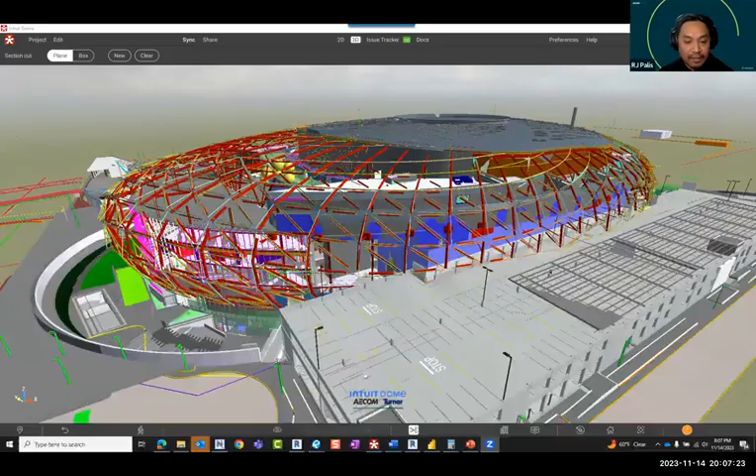There's always going to be something you're going to learn, so hopefully I learn from you guys, and hopefully I can share something you don't know as well. Okay, so we're going to do something new. I'm going to create a project from scratch, so strap on your seatbelts, I guess. We'll see how this works. All right, I'm going to share my screen here, so I'm not going to toggle between different things. Let me know once you guys see Bluebeam. You can see I was kind of getting nervous earlier.

I was like, I gotta make sure this works first, okay? So I did some demo here. I'll keep this in my back pocket in case things go awry. And we can see it, okay, RJ? Perfect, perfect, all right.

So where do I start? Some settings. Now, on a design review, I think at one point in your careers you're going to have to do some sort of design review, especially if you're in a company that specializes in design builds, where a GC would contract out a team of designers under them. Maybe it's the GC that would run this design review process. And what a design review is, you can think of it as a page turn or page flip back in the day, where you go and review the drawings and see if it's constructible, or if it meets the design criteria by the owners. What's beautiful about Bluebeam is that you have this platform that can centralize that information.

And what we'll show later with Bluebeam Session is that you can mark up at the same time and have that information come back to you in real time. So this is going to be an interactive session. I'm going to send in some links so you can join the session, and some templates so you can apply it on your end. Let me know when things don't come up, and we can work it out as we go.

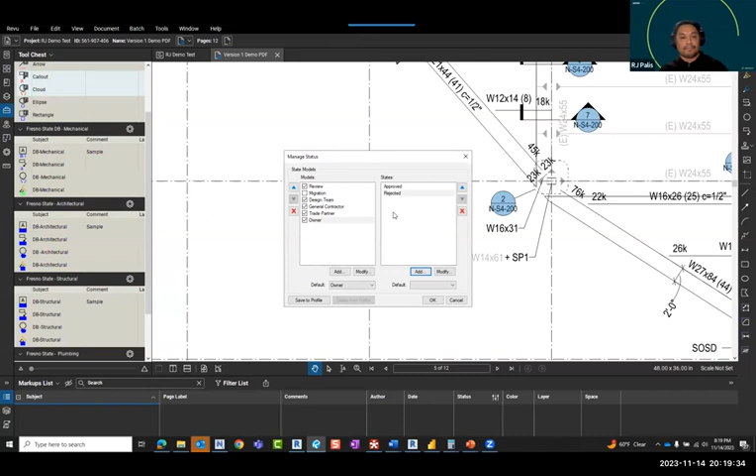So that's the second setup that we want to look at during this process. We're kind of conditioning this particular document to accept, to have these sort of built-in features within it before we get started. I'm going to go ahead and export this profile.

That's because I want to share this with you guys, because this is part of the interaction - you'll be able to import this to your system and use the setup the way that I have it, right?

And that's typically what's done in projects, is that it's not a BIM manager, it's probably a design manager or design coordinator sort of setting this up, right? So I'll go ahead, because I'm going to forget where I put this, I thought I have one here, OneDrive.

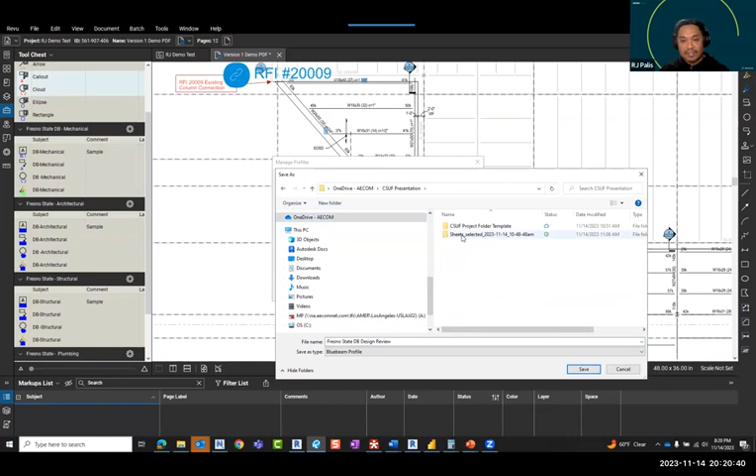Forgive me that I use CSUF. I don't think that's the abbreviation for Fresno, right? That's Fullerton, its abbreviation. Yeah, okay, sorry.

We'll forgive you, okay. Thank you. So what I'm gonna do is go ahead and open that. I think I can drag and drop here on Zoom in the chat. Can I do that? What's the best way of sending this to you guys? I'm going to try the chat.

Let's see. Yeah, it looks like you could attach a file in the chat. Okay, cool, for everyone. You might have to go through the chat to attach it. You can. Then if you go to the little three dots, it should work. Yep, I found it. It's gonna work. Just let me know, I'm gonna attach it right now and let me know once you guys get it.

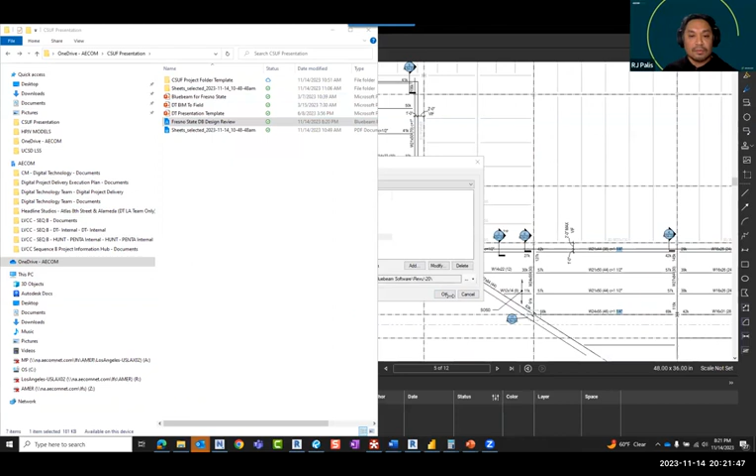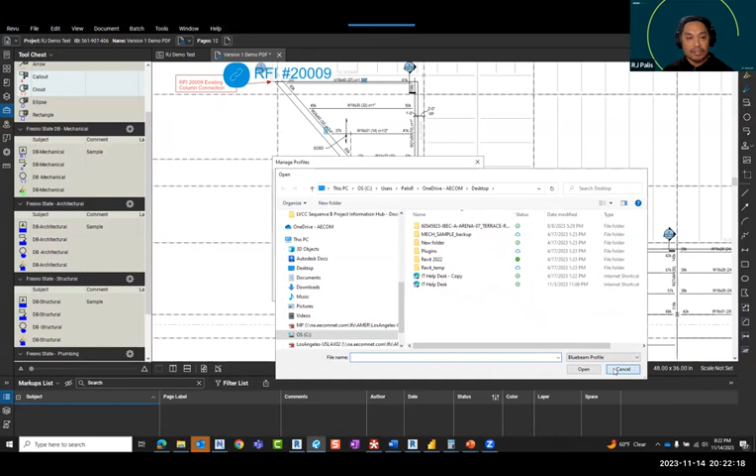Yep, it showed up in the chat. Okay, perfect. Now to import it, once you guys save it to your local drive or wherever you want to save it, it's as simple as going to Profiles under the Revu tab, Manage Profiles, Import. Then you should be able to look for your file wherever you saved it, and go ahead and save and open it. It should now be an option for you to use.

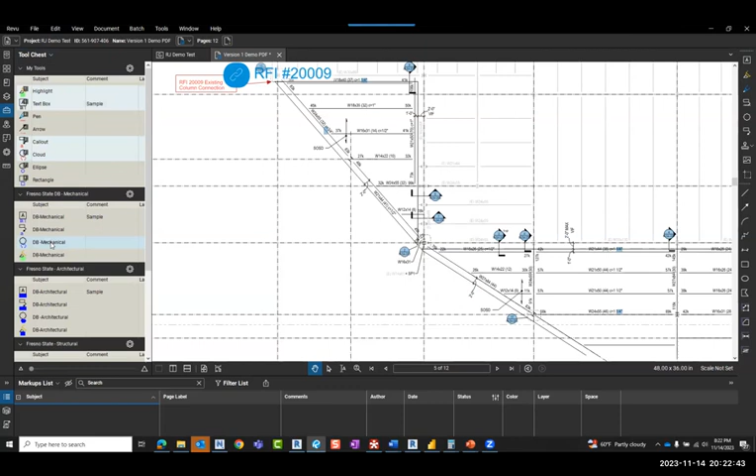So when that's done, let me know if you guys need some time to catch up for those that are following. Once you select that, you should now have this tool chest as an option. RJ, you can also open it just as a file and it'll automatically import to Revu. Sweet, okay cool, thank you. All right, thanks for that tip, Louise.

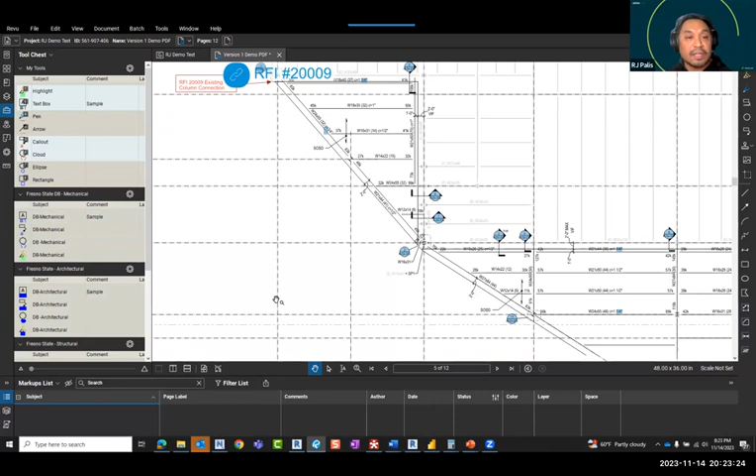Any questions there before we go on to the actual Bluebeam project now? So what we did right now is pretty much just condition this particular document. I use this one to create these samples, but later on, after I put this file on Bluebeam Project, you'll see that since you've already acquired the template, you'll be able to apply it here on the Bluebeam Project. So now we're gonna go and actually, I'm gonna check this back in.

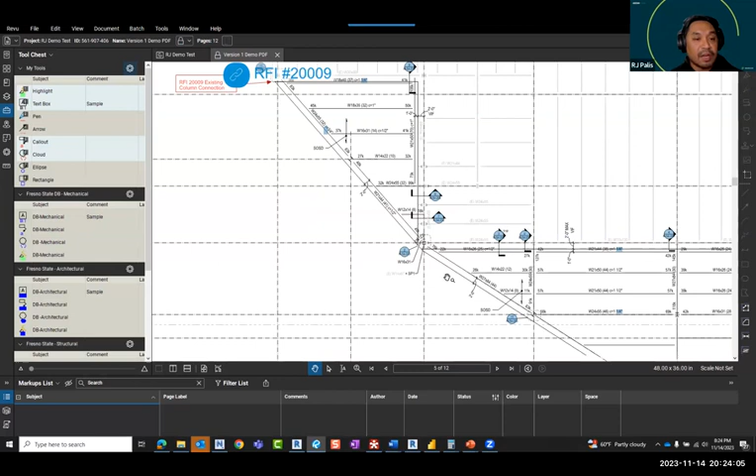Now we're going to go into the Bluebeam Project. For those that don't know, it acts like a file server where you can store files all in the cloud, the Bluebeam cloud environment. And what that does is you're able to share and work on those files almost at, I don't want to say at the same time, because there are sort of gatekeeping methods where you're only able to check out documents. That way it protects its version from being overwritten, right?

So now I'll go ahead and demonstrate how to create a Bluebeam project. I'm not sure what version of Bluebeam you have, but I think I did not have that as my option here. That's okay, I can always go. So whatever, on that profile that I had, I did not list studios. I didn't have an option there for studio, but that's okay.

You can always toggle back to one that's a safer one, and then we can toggle back to the other profile later on. What I want to show you is go ahead and click on the Studio here on the left-hand side. There are two tabs you're going to see here, one for projects and one for sessions. I will make sure that you're signed into the right server, signed into the right account. You'll see that you're connected online by this symbol. So I'll go ahead and click on Add. I'm gonna create a new project. I'm gonna call this Fresno State DB Demo.

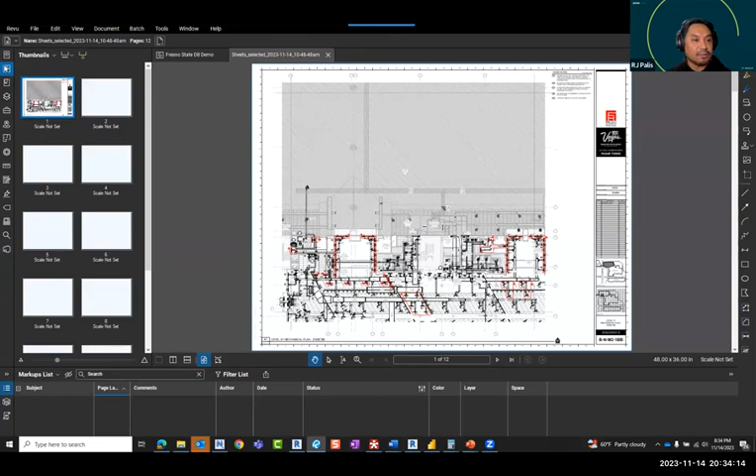I'm gonna go back one folder, and I extracted this from a project. We're gonna get 12 sheets, it's not gonna be 12 on your project, it's probably gonna be 100, 1,000, whatever. And it's all just lumped into this mess where there's no bookmarks, nothing, and you're like, what the heck, how do I organize this, right?

And you guys probably know this already, but there's a thing called bookmarks and thumbnails. I forget the order I want to do this, but if you do get a file like this, what you can do is create thumbnails first. And to do that, we want to create page labels, and page labels will help you organize this a little bit later.

So what I'll do is go ahead, instead of bookmarks, I don't have bookmarks on there, which is a pain, so you even have to create your own bookmarks. But first I'm going to go ahead and do thumbnails. I'm going to create a page label, and I'm going to use a page region. You guys know how to use this already?

Yeah, I've used it before, but it's kind of hairy. Okay, same. Okay, we'll see if it works.

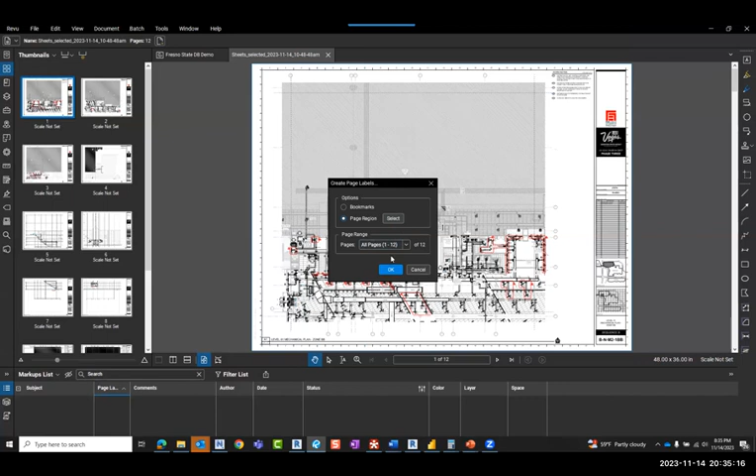So I'm going to go ahead and hit OK, choose a rectangle that contains text. Oh, you know what, I might have done that the opposite way, I don't remember.

Yes, I did it the opposite way. I think what we can do first is create a bookmark. Let's forget what I said earlier, I think I'm going to do this first. Go ahead, page select, create a bookmark, and I'm going to go ahead and highlight the title block.

That's your first region, and you'll see a preview there. I'm going to put up a space and then add another region, and click on the sheet title. And now that's how it looks. If you're not happy with how that looks, you want to put some space or a dash or something.

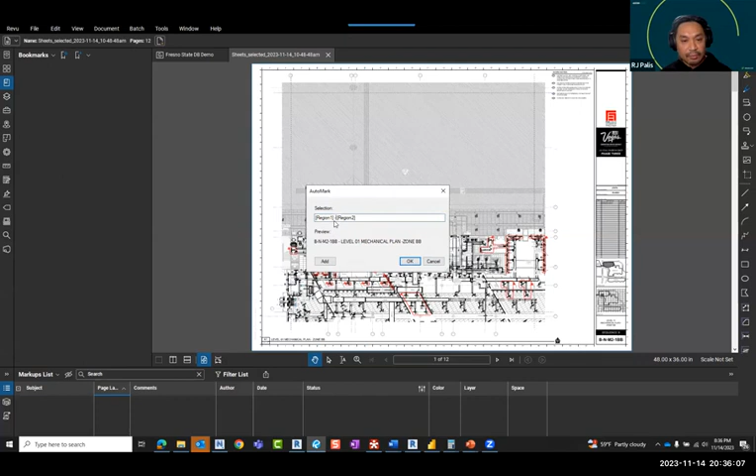I'm not sure if there's a limitation or a constraint here with what kind of character you can use, but I'm going to go ahead and use a dash and hit OK since I like that format. I'm going to go ahead and click OK, and it looks like it works.

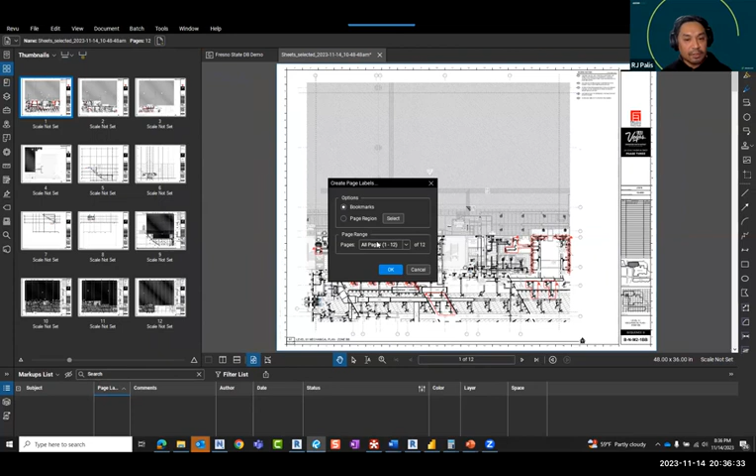And let's look at our thumbnails. Our thumbnails are not set up either, but what we can do is go ahead and create page labels depending on the bookmarks, right? Since we already created it, hit OK, and then bam, done. And now it's a little bit neater, it makes sense, you can read it from a high level. But let's take it a step further here.

I don't know if you guys have created nested bookmarks, but it's a great way to organize your drawings. It's manual, but it sure makes it super easy to organize and to view. To do that, you might have a better way of doing this, but this is the way I do it — I would go ahead and add a bookmark before, and I'm going to go ahead and type in, in this case, M for mechanical.

What I'm going to do is highlight these M sheets. These are the M sheets here, and it's kind of tricky dropping it into mechanical. So it's almost like... there you go. See, now you'll see that it's nested, right?

I'm going to do the same thing for structural. That's not going to work. Let's do that again. Add a bookmark, add before. I'm going to call it structural.

So it's almost like you're putting a WBS together. Yeah, if this was a spec, you can organize it. Not a lot of people do this because they rely on the naming to set it in order, that's fine too, but just kind of showing you guys. It's a little cleaner.

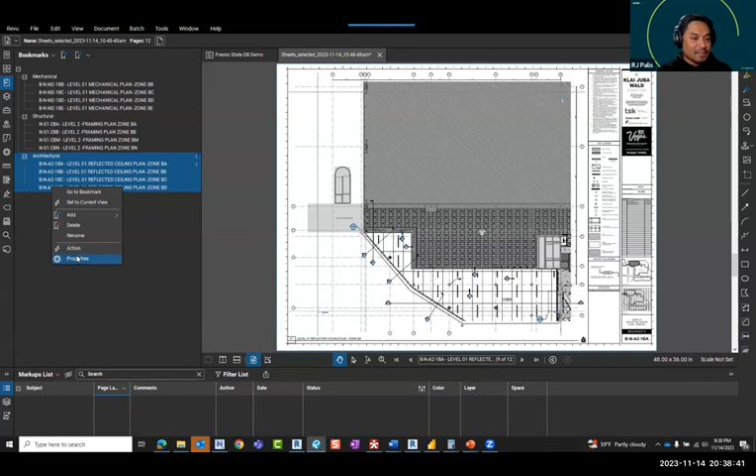I didn't know you can change the color of these. You go ahead and select it, right click. It was actually the interiors team that liked to color it, so that kind of made sense. So you can change the color to whatever you want. Makes it look nice, I guess. Just an option for everybody here to see. Don't know how useful that is, but it's kind of cool, right?

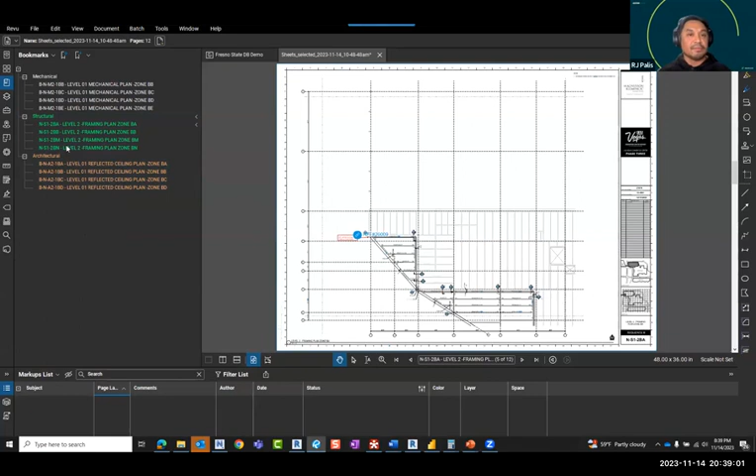All right, great. So that's one option you can do to organize the sheets.

Now let's see, I'm ready to save this. I'm going to use my profile here. I'm going to go ahead and just make sure I can still pull it up. Everything's still there, I'm using my DB design review profile.

I'm going to go ahead and save this, I'll save it back into my folder here. I'm just going to say Fresno State. Keeping an eye out here for time. Design review demo.

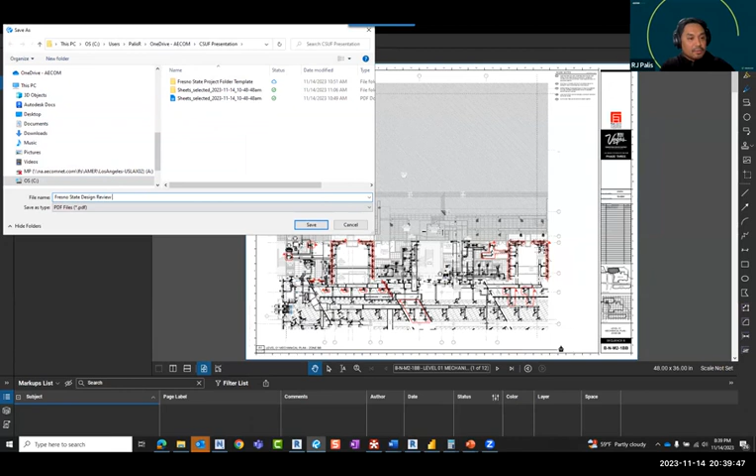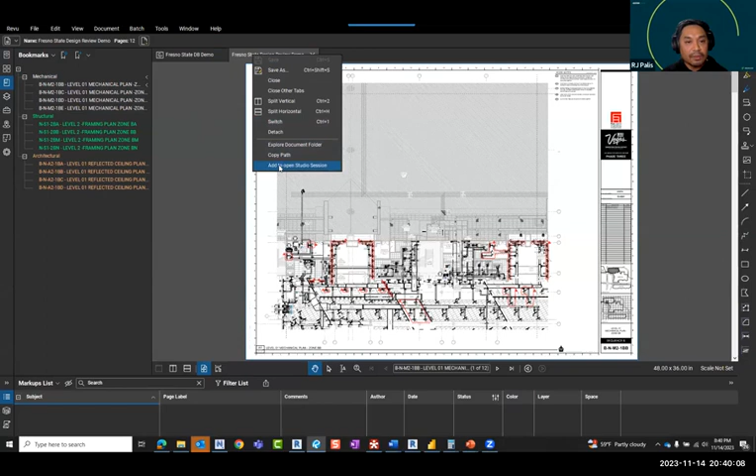All right, so now it's saved locally in our drive. And the quickest way that I know you can save it to a project is, I think I'm okay with add to open studio session, which we don't have one. We do have a project. So what I'm going to do is go back to my project.

I'm going to go ahead and click on the parent folder here. And somewhere here on the top where I have this Zoom window blocking me, so I can go ahead and upload files. I'm going to go ahead and upload a file. I'm going to go down here in this prompt. You guys probably know this already, but I'm going to go ahead and open the files that are currently open, or add the files, and hit OK.

And you'll see that this file now lives in the Bluebeam cloud. So now this is accessible for everybody, not just locally, right?

When I click on the file, you'll see that there's a lock up here. That means that you can't edit this file. So you'll see that all your markup tools are grayed out. You can only do a snapshot.

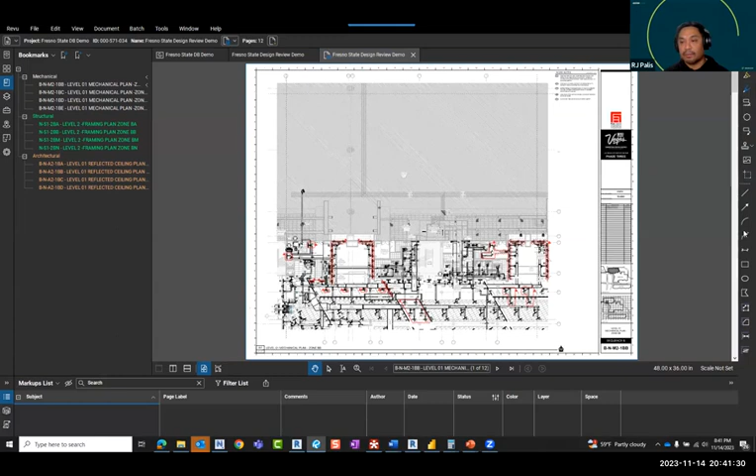For someone to edit this, they'd have to click on this lock up here and say checkout. Now your markup tools are available to use. Once you're done using this file, best practice is to just check it back in.

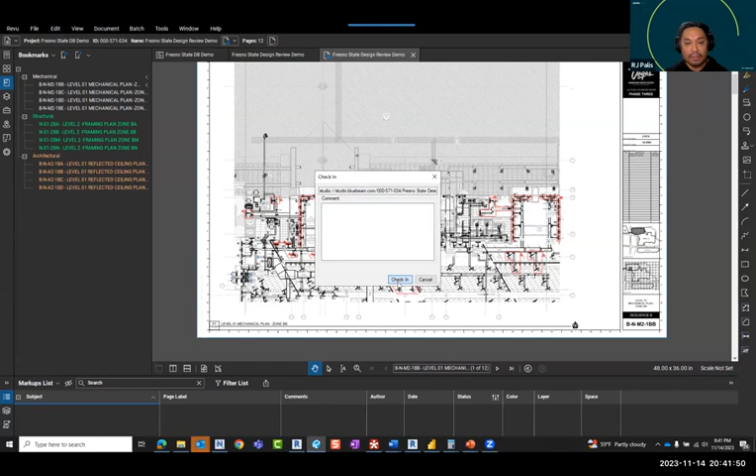Right, we can add a comment. Let's say you change something and you want to add that comment here, go ahead and do that. But I won't in this case, I'll just check it back in.

All right, we're going to go and speed up a little bit here. What I'm going to do is make this available in a Bluebeam session. And what we'll do in that session is have everybody be in that environment and then start marking things up, correct? So what I'll do is the quickest way is I'll go ahead and...

Let's see, open studio project tab. It's locked right now, and I think that's why I can't check it out. So I'm going to go ahead and open it real quick. I'm going to check out, and then I'm going to add it. I'm going to right click.

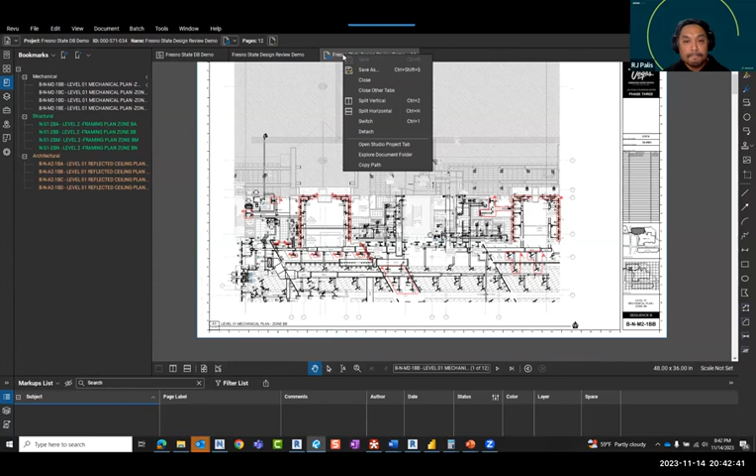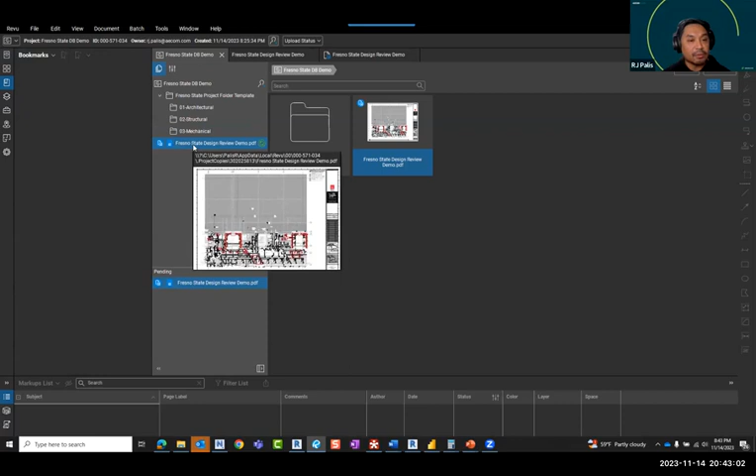Not letting me add it to a studio session. So there's another way if you get stuck like I am right now. I think the best way is to create first. Typically you would be able to upload this to a Bluebeam session, but I can't seem to make that work right now. So, but there is another way.

I'm gonna go ahead and open up Bluebeam Studio again. And you'll see right here, Bluebeam sessions. You can create one here. In this case, what I'll do is I'll create a brand new one just for the sake of showing you guys. And to do that, I'm gonna go ahead and let me just leave this one.

You'll see that there's a plus here, and I'll go ahead and do a new session, Fresno State Design Review. Now you can look at it, you can add the files now and say either add manually, and you'll be able to look for it in your folder. And let's just try this one, add open files.

This looks like the file that we have open, our demo. I'm gonna go ahead, I'm not gonna restrict it by email address. I'm just gonna make it open for everybody. Hit OK, it's gonna create that session.

And it's gonna add that file. It's gonna ask me to invite people here through the same way that we had earlier. What I'm gonna do is copy this session invitation, and I'm gonna put it up on the chat for all you guys that wanna join. And I do encourage you guys to join in the last few minutes here.

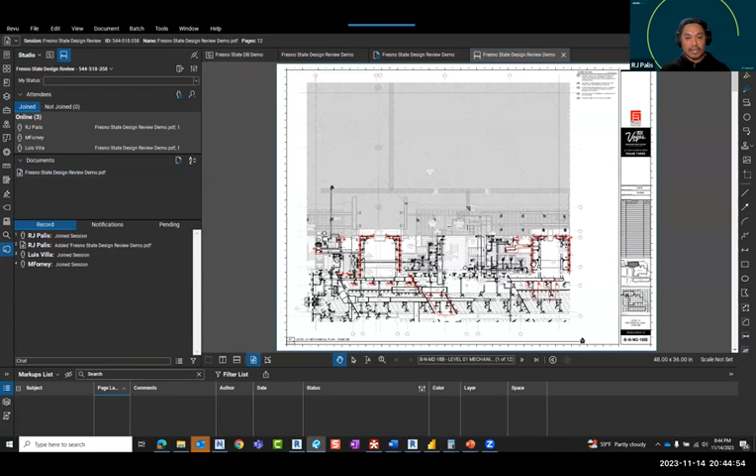So now what happens in the Bluebeam session with this document, it locks it in place. You can't add the statuses anymore. It's pretty much whatever was built in that document like we had earlier, right? You can still, however, pull up your profile here.

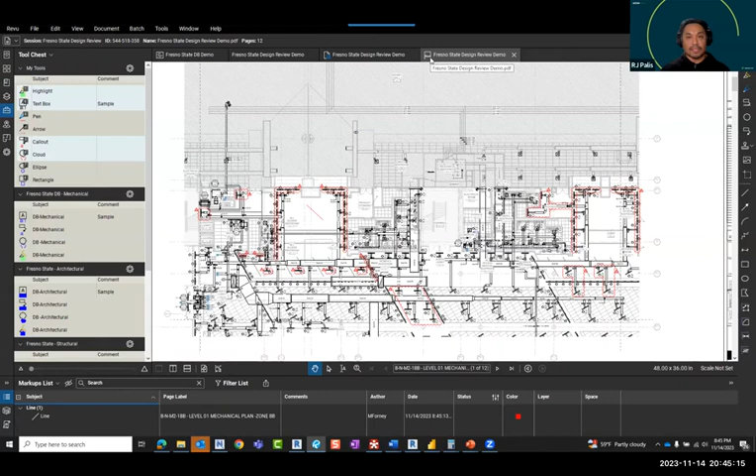Right, and you can see we're on the Bluebeam session because of this icon. I'm gonna cancel. So let's do a little bit of role playing here for those that are joining. We're on a design build project. You typically have designers that are on a project as well as subcontractors.

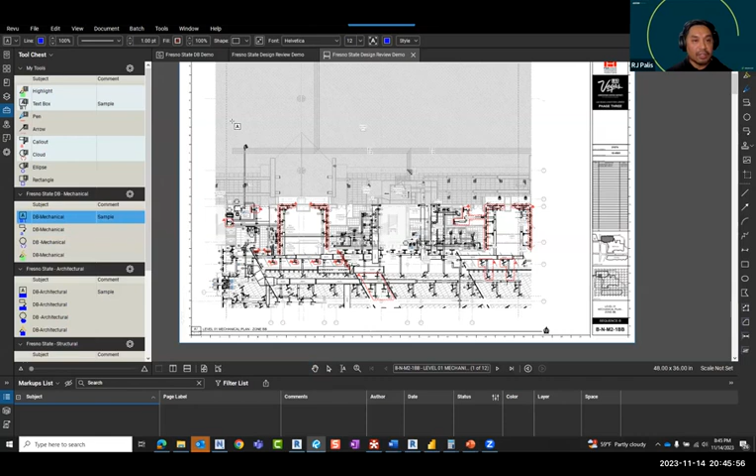And what the tool chest does now is, because we set it up this way, if you are an architect or if you are a structural engineer or a mechanical engineer, you have sort of these tool sets already built in for you. It has the settings already, the color, the font. So you're ready to go.

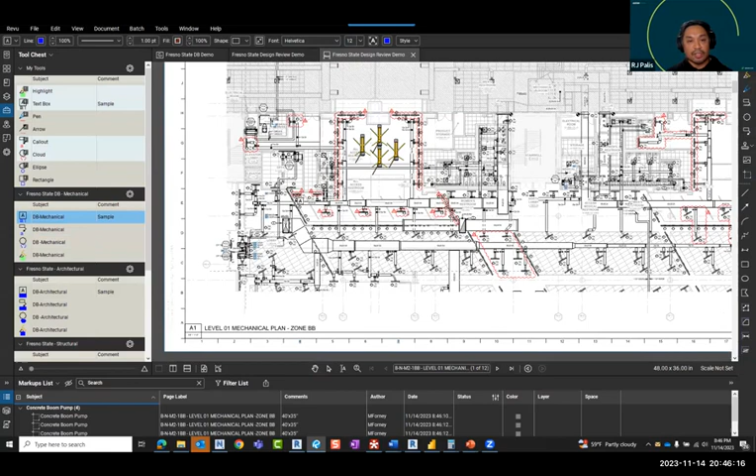You don't have to think about what you need to pick out from your tool chest there. So this makes it easy for the design team to start marking up, as well as it creates this uniformity within the project, right? So if you are on this sheet, you can start tagging things.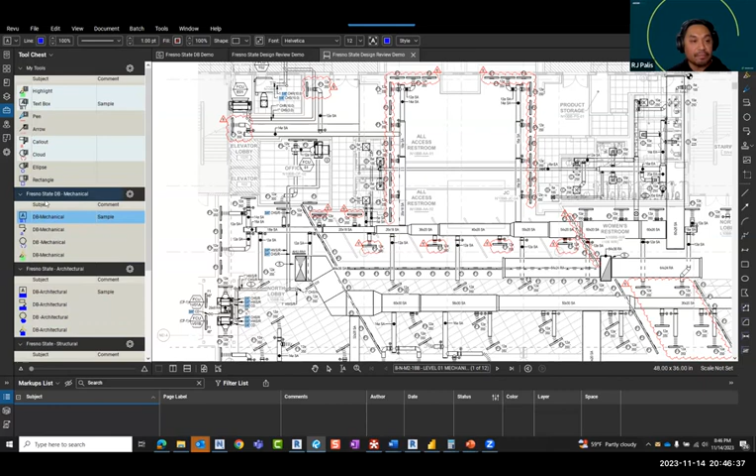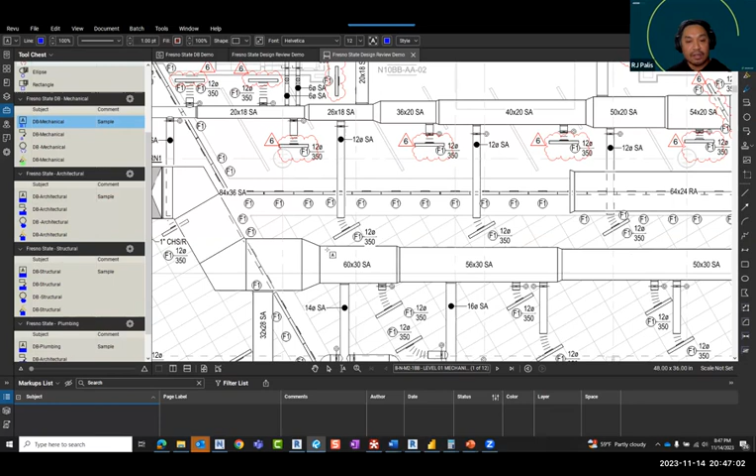Typically, what I've done in the past, what a lot of people have done in the past, is that they would have different color for each trade, right? And what I learned two weeks ago is that this method is not necessarily better, but because of the custom statuses that we built in, we can actually change the color based on the review status.

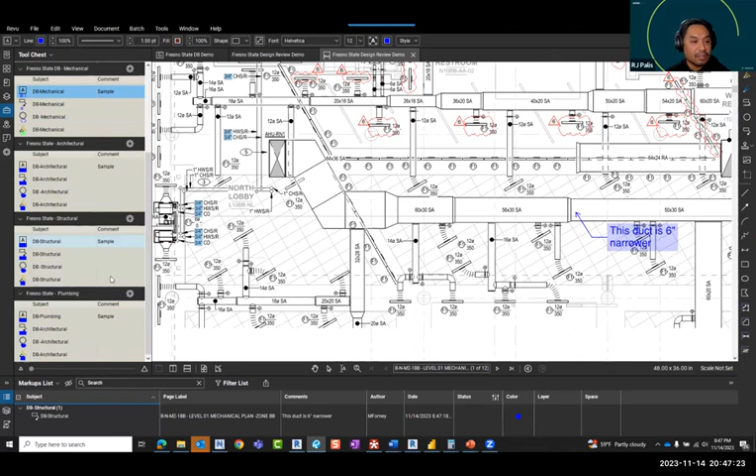And in the design review, sometimes the review status is more important than the color of each trade, right? And so like in this example, if we're all on this sheet and I'm the mechanical engineer, and you'll see that too, is because of how we built out the tool chest, you can see that this is structural making that comment, right?

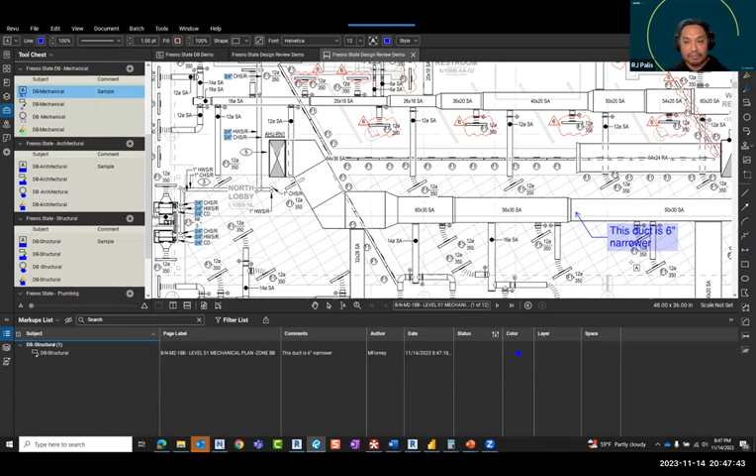It looks like that's Matt doing that call out. And what happens is if I was the designer, so right now, I don't know Matt, if this was, yeah, so this duct is 6 inches narrower. If this goes back to the subcontractor, so basically this is the originator creating this comment.

If I was the trade or somebody needs to address this comment, what happens is I see this comment from the engineer, I look at it, and then through the process of updating this detail, I can now say the status is, oh, I'm not sure why. It did not inherit the same file that had the statuses earlier.

I'm gonna go ahead and import. Let me see if I can import the status. I don't think I can import it at this point. But that's why I had the backup demo earlier, just for this exact reason.

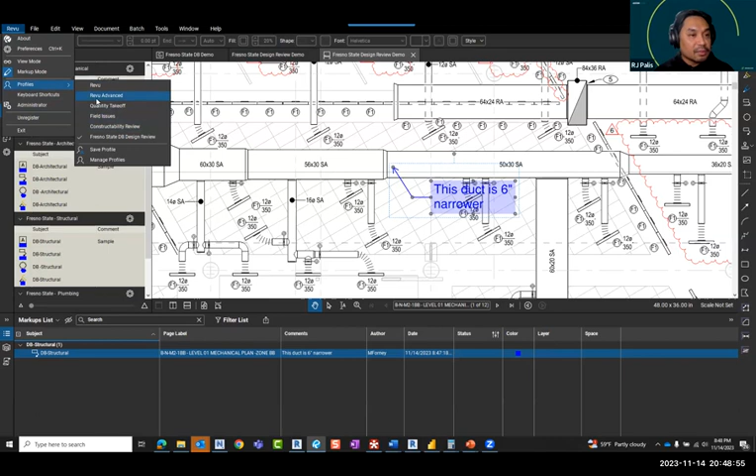I'm gonna go back to my previous slide earlier, constructability. Oops, Revu Advanced. I'm going to go to my studio session. I'm going to jump out of that session real quick, and I'm just going to go back to another session here from earlier.

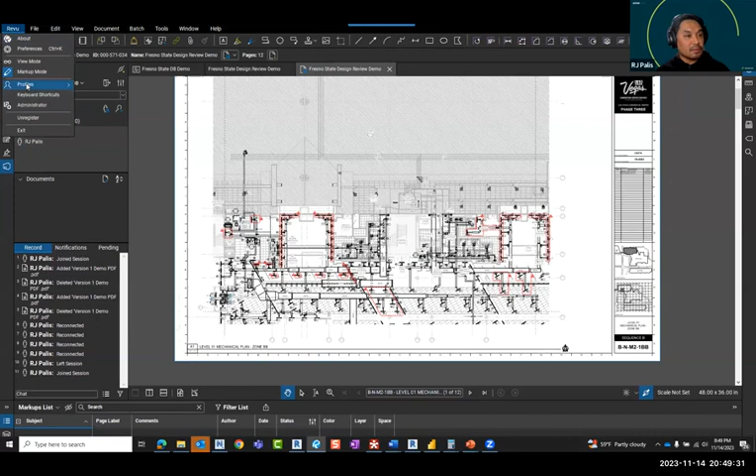And what I wanted to show you guys, let me open this real quick. Let me see if this works. Save profiles - oops, I was going to say design review. Let's see if this works. Okay.

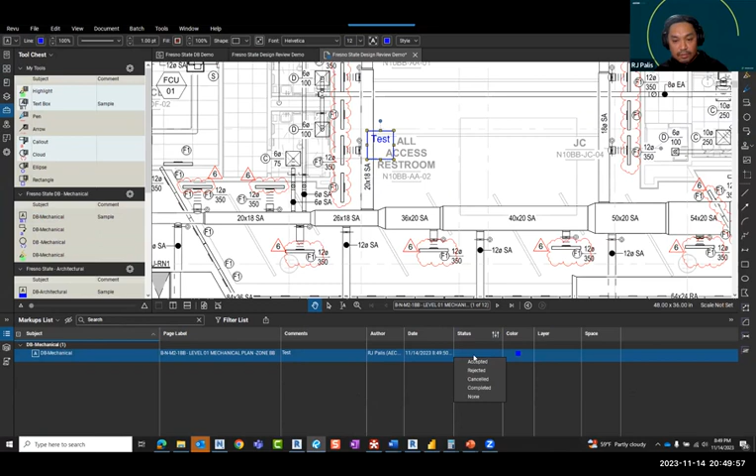I'm gonna go ahead and access this test. I hope it works. Oh yeah, it was not. I think it's because the file we were using earlier was not the same exact file, and that's why setting it up first on the sheet is important.

The status here would be able to pick up those status updates that we built in for that particular document. And I think I know why - the document I'm using now didn't have that custom status.

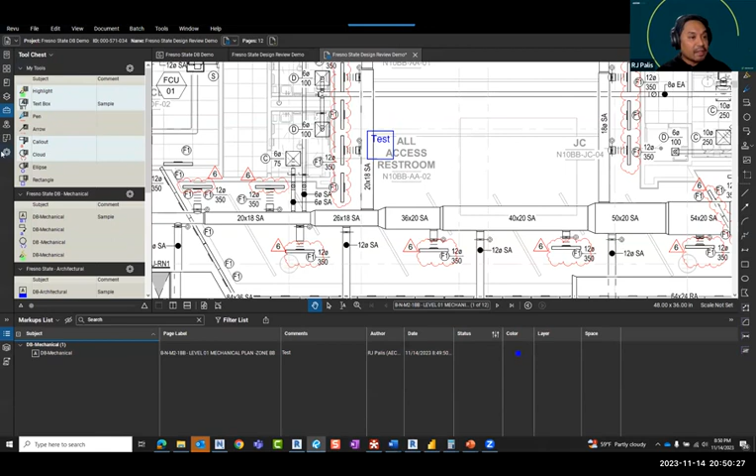So let me go ahead and go back, and since we're near the end of the presentation, I think the timing is just right. I just want to make sure this works here. So I'm going to go back to the same one that you guys are on.

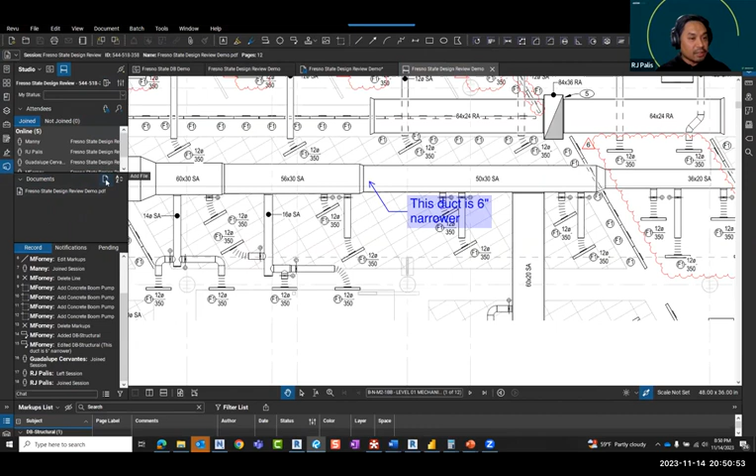I'm going to add the other document that has all that stuff built in. So under documents here, you can click on add a file. And the one I was working on earlier is - let's see if this works. That's the demo, 839 - I don't think that's the one.

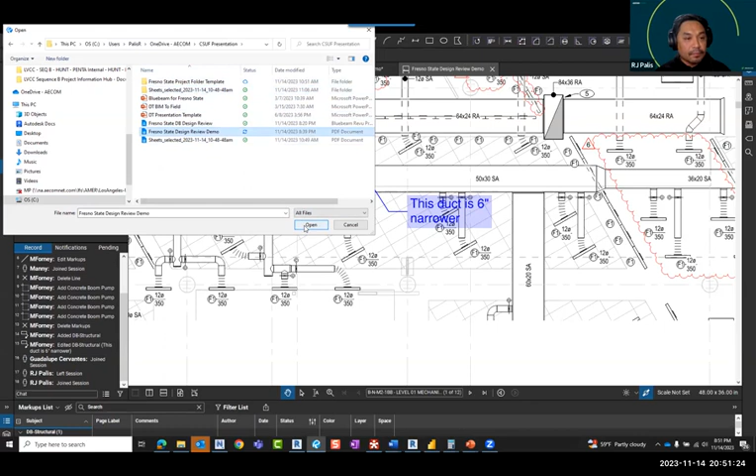I'm not sure if this is the one earlier. Oh, you know what? I think I did delete that one and I did not save a copy. Anyway, that did not work out.

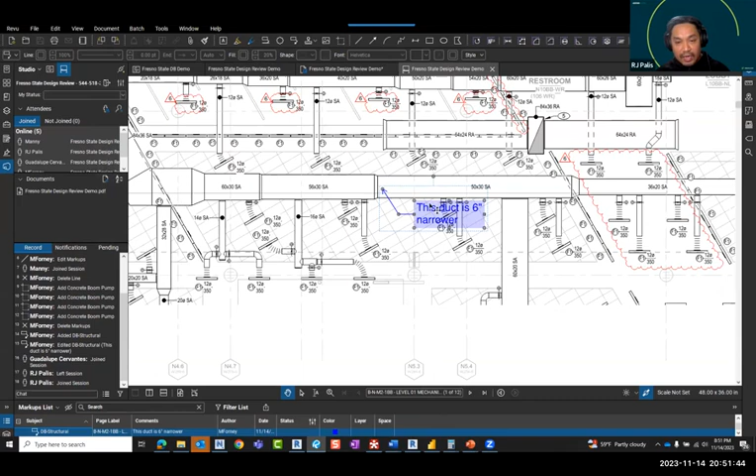But what I wanted to explain to you guys is this comment here, depending on who is answering, what you can do is - let me just expand this real quick and get this Zoom window out.

There you go. What I had liked it to have happen is you'll be able to change the color based on the status. Earlier on, you saw that there was other status I created depending on who's reviewing it.

So let's say I was a contractor and I saw this email, this comment from the design team. What I can do is go to a status here. You would see the different types of responses that I can use.

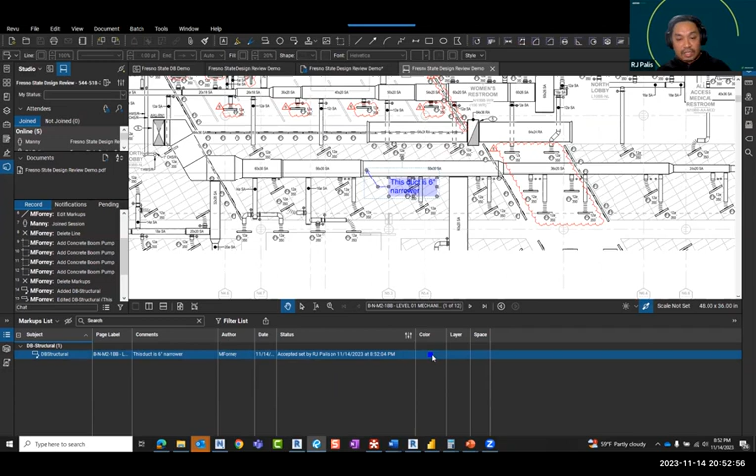So if I was the contractor replying, I can say there was one setting where I said we need to discuss this, or discussion is needed, right? What that does is it changes the color. Let's say for this example, it becomes orange - well, I can't change it now because it's not part of the template.

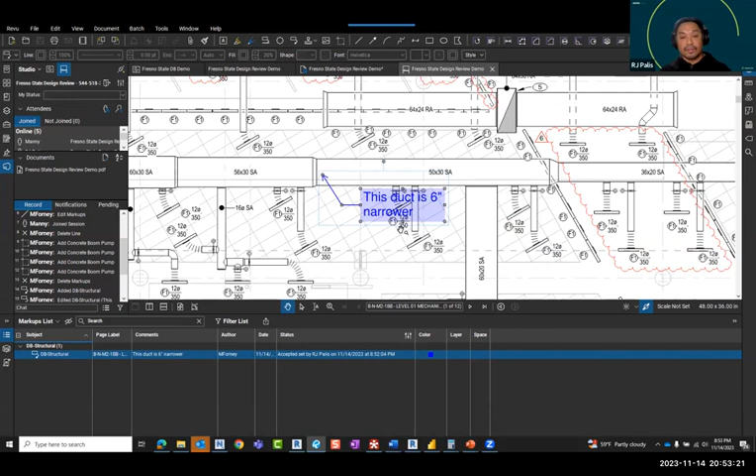What happens is, based on that status parameter, it's going to change this particular comment to an orange status. And visually, if you're looking at it from a high point of view, if it's orange, that means there are extra steps we need to follow - like in this case, we need to discuss it further, right? So that lets you filter everything based on the status.

What you can also do is, under the meeting invites, you see there's a bunch of you guys here. I'm not sure if anybody's added more lists, but since Matt's the only one that has one, you can right click and filter the markups based on that list.

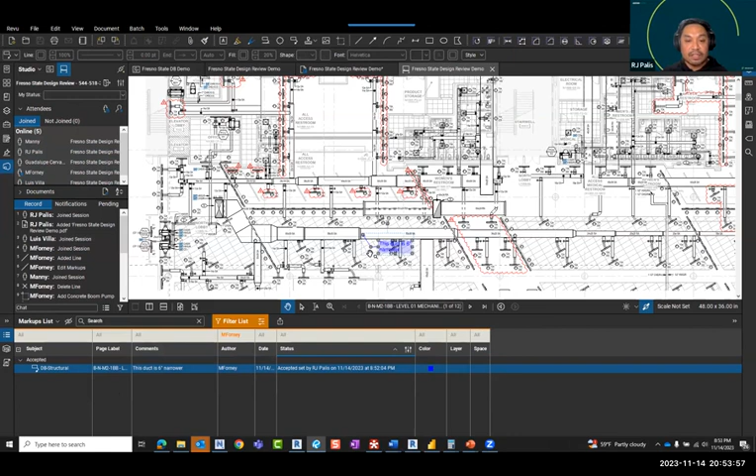So let's say you're the subcontractor, you're the steel detailer or a mechanical detailer, and you want to just see the comments from the mechanical engineer. You can look for that mechanical engineer here, right click on them, and filter their markups based on that. So if you're reviewing this, it makes it super easy to look at what your mechanical engineer is asking you to change or update.

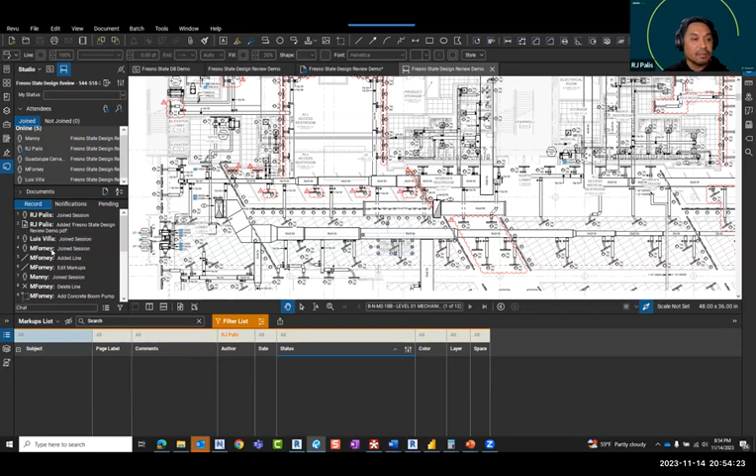So I'm gonna just do a couple more tags here, just so you guys can see, and then maybe Matt or Luis, if you guys want to add a couple more random markups there, so we can see the filters working. That'd be great. Go to my tool chest.

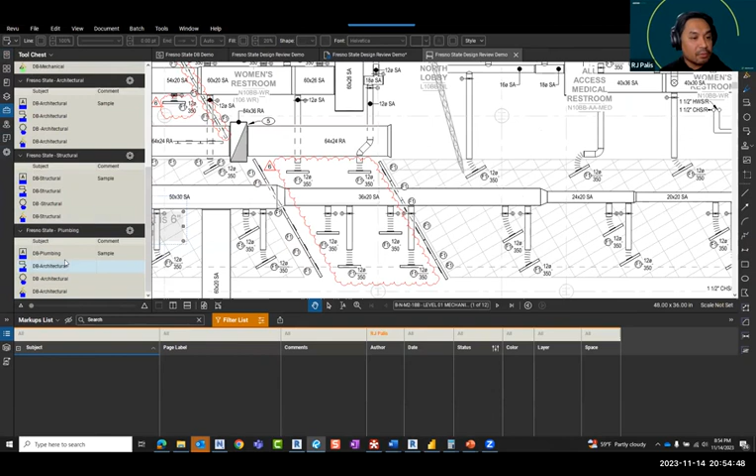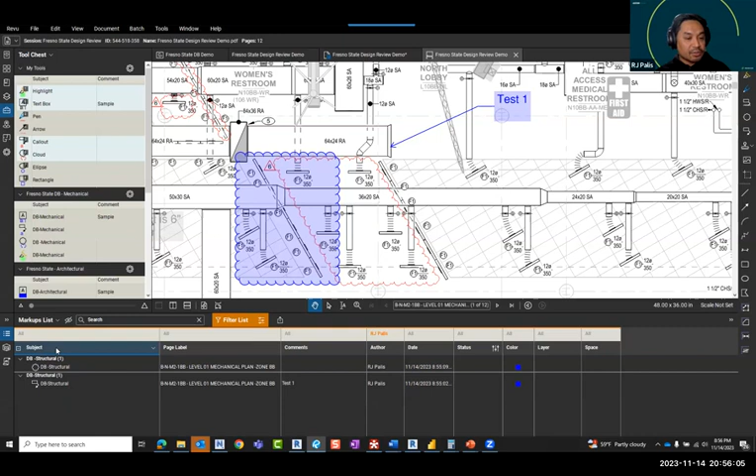You'll see that since I have my filter currently selected here, it's only filtering out things that are assigned to whoever created that. What's cool too is, based on this, you can filter your markups based on the subject, and that's why it's important to name these the way that you want. Typically on a regular session you'll see a lot of callouts just labeled 'subject is highlight text box' - contextually you don't know what that means, but if you set it up in an organized way, you can filter it as such. So if you want to look at things from the structural engineer, you can filter it out as structural, or filter by page or by author.

So there's real value in creating these tool chests first for the document, and then also the status, which unfortunately I wasn't able to make work, but I hope you're still able to see how that works. I'll make this available offline for you guys until I figure out how to make that status field adjust next time.

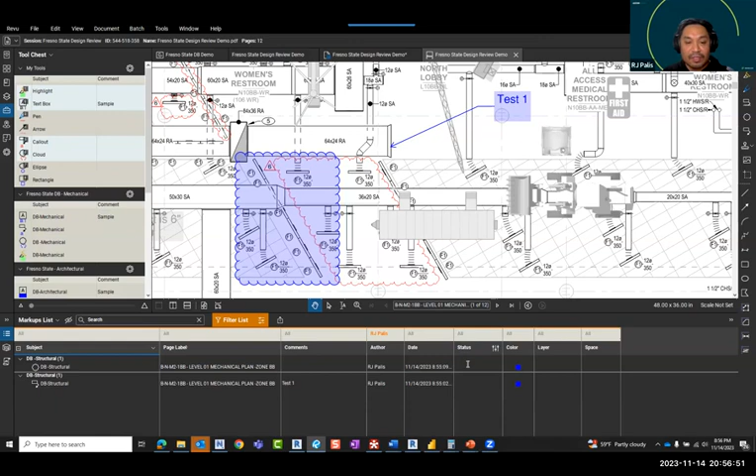But that's all I have, guys. If you have any questions, let me know. I hope this has been helpful, and sorry I couldn't get that status field to show up. But that is the value of having a Bluebeam session, where you have this environment where you can click and select markups or add markups.

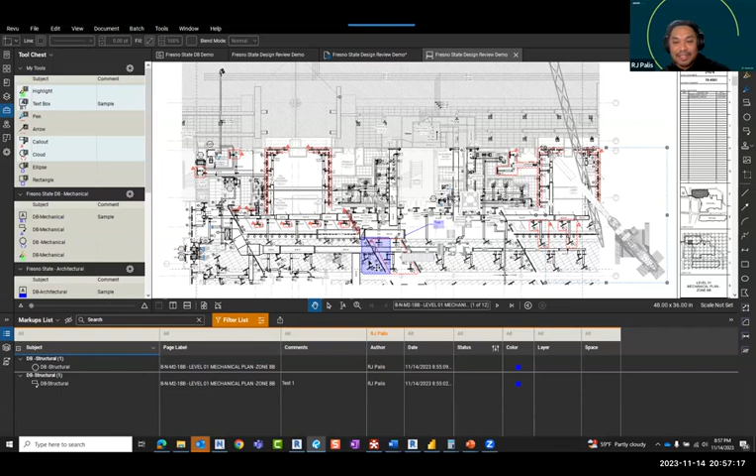And you'll see here, as whoever's adding the zoom boom there - or is that a crane? You can go ahead, but I can't delete their markups, and that protects the integrity of the document, right? Nobody can delete someone else's markup. Oh, there's the zoom boom.

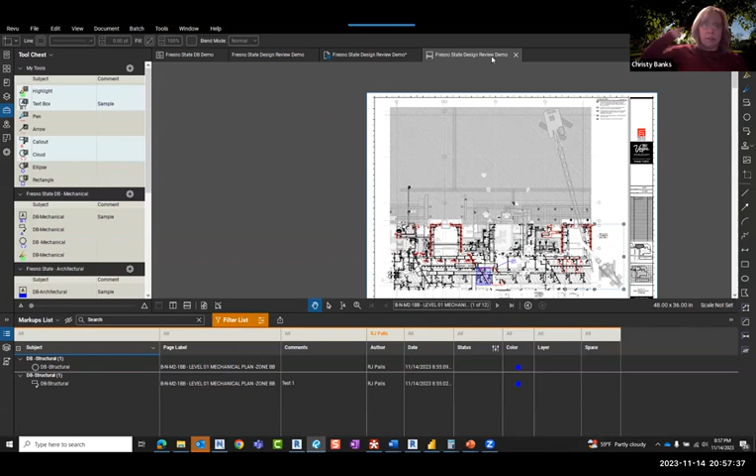Yeah, that's pretty neat, especially on project work, like when you're having a coordination meeting or something, being able to utilize the studio to do that kind of thing. We've done that sometimes too, especially on our commercial team, RJ, where we all get in there developing an RFP and making changes - we get in and mark it up so we can make changes. So even though it might not be project work, we still use Studio in a similar way.

I've seen it used for specs reviewing too - you can do anything that needs to be reviewed by multiple entities, multiple people.

Yeah, I would say in some ways Bluebeam's easier because you see everything. We've done it in Google Drive too, and it's like, oh my gosh, I feel like it's a black hole with Google Drive - a little hard to follow, but you can see everything right there in Bluebeam.